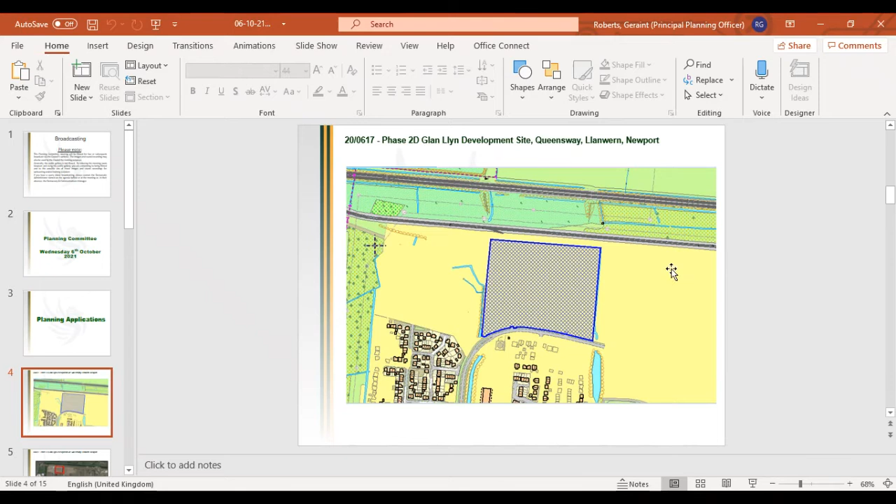Okay, so in effect, then back to the presentation, what we have here is the blue hatched area shows you the phase. Effectively, the land to the west is currently being developed by Bellway, and we've granted approval for houses to the east for Lovells. Okay, so this is, if you like, a fill-in plot, and you'll obviously notice from the number it's been with us for some time.

Okay, so just to confirm that location and where it is, this is the Glan Llyn site, the former heavy end of the steelworks, Spytty here, the Eastern Distributor Road here at the bottom of the picture, and you can see the already developed areas of the site, and this is here, and the mainline railway running across the top, and the Tata service lines running in by there.

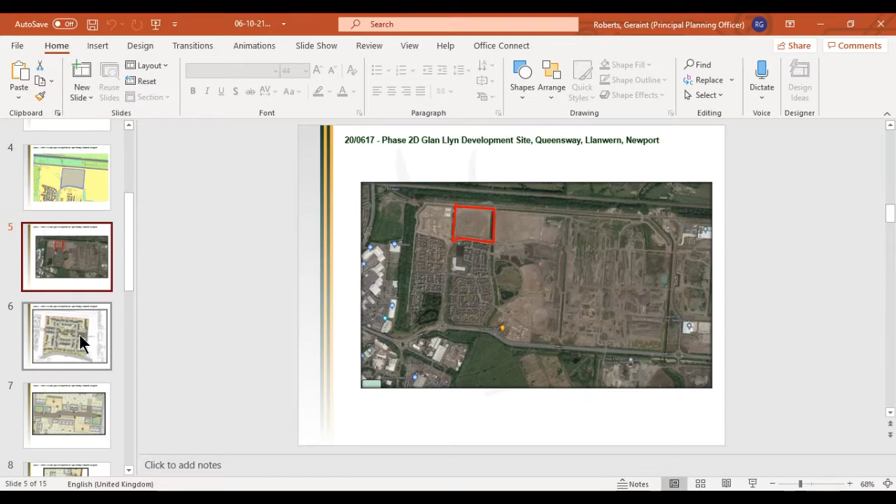So that's the location of our site, and this is the proposed layout. Now, the Avenue Loop Road we talked about is this main road here, so this road is the main road into the site. It will loop round eventually and join up with EDR at both ends, but currently it doesn't. We do have an application in for those final stages of this road, which we're currently looking at. So you can see there is effectively a road in, loops round, comes out the other end.

So these spurs effectively control the layout, and there are connecting roads. One here is a formal standard road, and this is a shared surface which will be permeable to pedestrians and cyclists but won't be to vehicles.

So effectively then we've got these perimeter blocks which face out onto the highways. What we managed to achieve is a good level of frontage, and you can see effectively the houses face out either onto the highways or onto the drainage system which are running either side of the phase. So these blank corridors will contain reens and they will receive the surface water drainage from the site.

Okay, so that is the broad layout, and we're satisfied with that in highway terms, in terms of tracking and also in terms of how it will function.

We were very keen to get connectivity through this phase, and we think we've achieved it. So there are bridges here, you can walk through the shared surface, across onto this main avenue, over the bridge and into the Bellway phases. So we think this links efficiently into the areas around it.

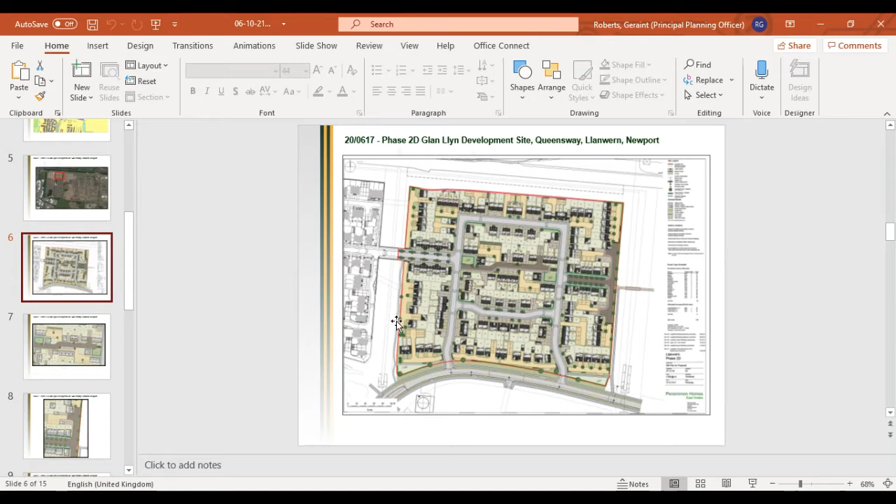Okay, so they've reached the normal parking requirement that we have for them at Glan Llyn, and they've tracked the roads and showed that they will work in terms of the service vehicles which will have to go there, primarily the bin wagon and a fire engine. So all of that is shown to work and we're satisfied with it.

Okay, in terms of the detail of the layout, then the shared surface caused a little bit of toing and froing, but we've got this arrangement, and now obviously you can see it larger, you'll see how it works. So it'll be a non-standard surface, it will be at level, it won't be curbed, there won't be a designated footway, although there is likely to be an area which is, if you like, indicated for the use of pedestrians.

But it will be a genuine shared surface. We're satisfied that it's quite short length, it has limited vehicle movement through it, and everyone who is using it will be people who live on it, so it's a cul-de-sac arrangement.

Okay, in terms of the way the houses will work then, there are some parking courts which you can see here, but they're very limited in scale on this development, and we think that they're appropriate because what that allows us to have is more frontage. And just to explain that, I'll go on to the next slide.

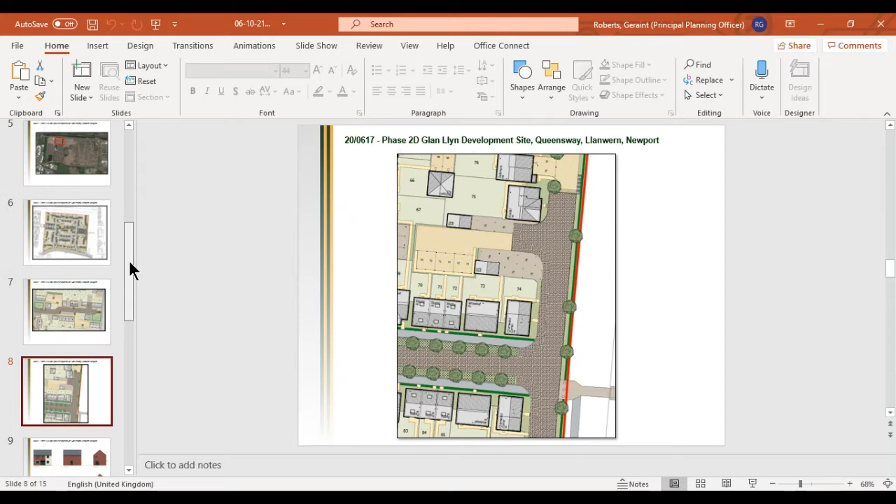Because we have these parking courts, we can have frontage onto the roads instead of basically having a lot of dead curb line and a lot of parking. Okay, so we think this has given us better street scene, and it's given us opportunities for public realm planting like this avenue effect here. So we're satisfied that good planting can be provided across the site and good public realm achieved.

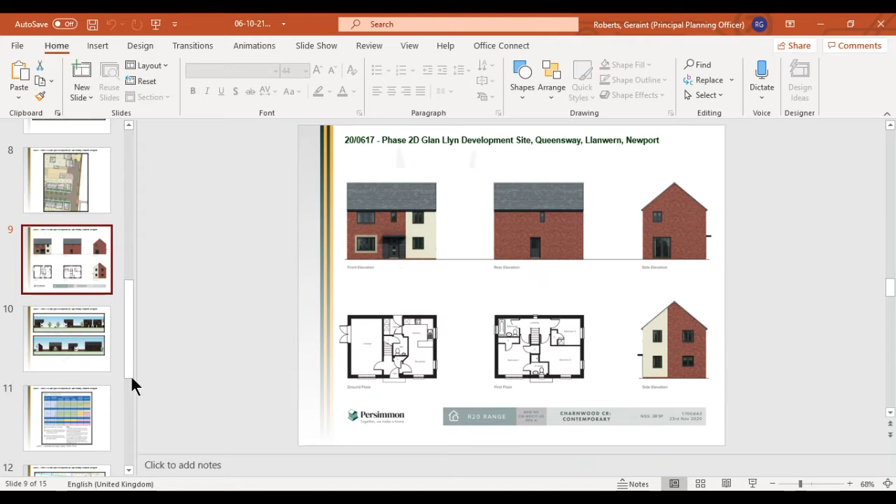Right, in terms of the scale of the building, they're basically 2-storey or 2.5-storey, and there's a limited range of materials, so brick, render, slate effect tiles, and there are small but architectural detailing which we're happy with in terms of detailing around the windows, for example here, the overdoor canopies and some cladding. So we're satisfied that the appearance of the buildings is adequate and will be attractive and lead to acceptable street scenes.

So these are a little crop from the street scene drawings that were given, and I'll give you an indication of spacing and the opportunities for structural planting along this avenue, which we've already mentioned. So we're satisfied with scale and appearance.

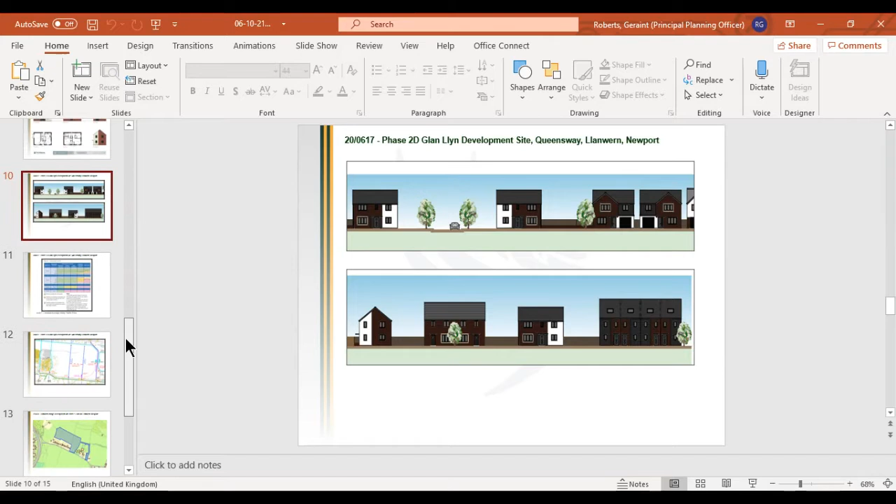In terms of active travel, this little table has come from the 2021 active travel guidance, which is quite recent from Welsh Government. It shows cycling and road speeds which are acceptable. We're satisfied that within the phase, the road...

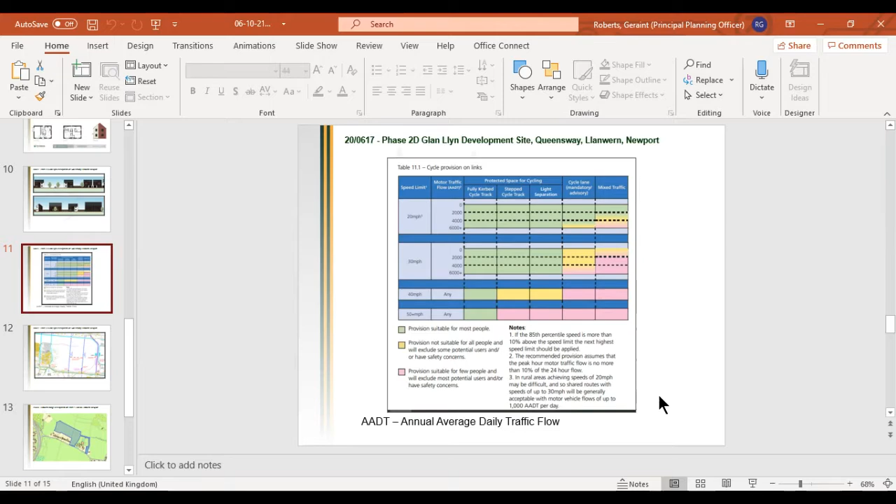Excuse me, Chair, sorry, can you just enlarge that a little bit more please? Because I've got a job to see it. Yeah, no worries, thank you, I'll make it a bit bigger if I can. There we are, is that better? It's a bit bigger now, yeah. Too big now. Yeah, okay.

Thank you for enlarging it. This little table is quite interesting because it shows us what design speeds we ought to be working to for active travel routes. Basically, anything which is going to have mixed traffic, i.e. the bikes and the traffic are in together, needs effectively very low traffic volumes and very low speeds. So that's just an interesting guidance that's recently come out from Welsh Government in terms of what we should be working to.

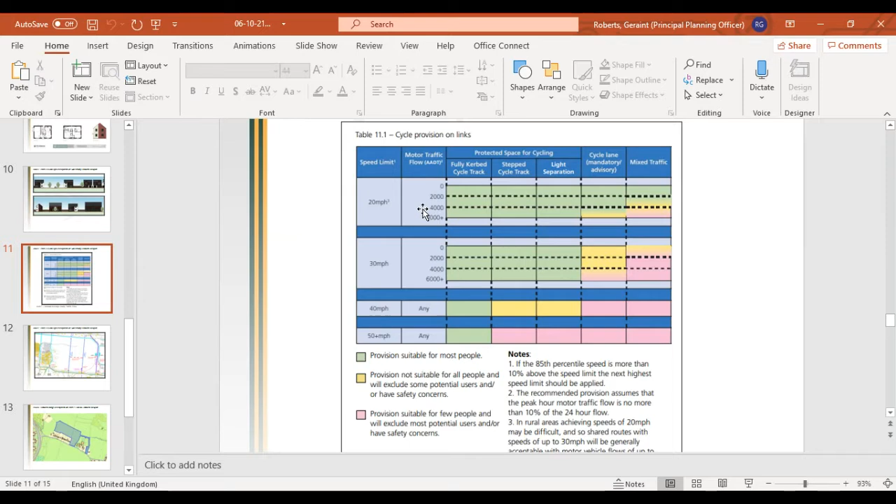But overall, we are satisfied that the road system within this phase will give sufficient low speed and an appropriate environment for people to cycle through, i.e. low traffic volume, low speed, which is what we're looking for. Effectively anything green is good for cyclists and anything orange or red is less good. So as soon as you get into high speed roads and high traffic volumes, most cyclists are discouraged. But overall, we're satisfied that active travel can be achieved within this phase.

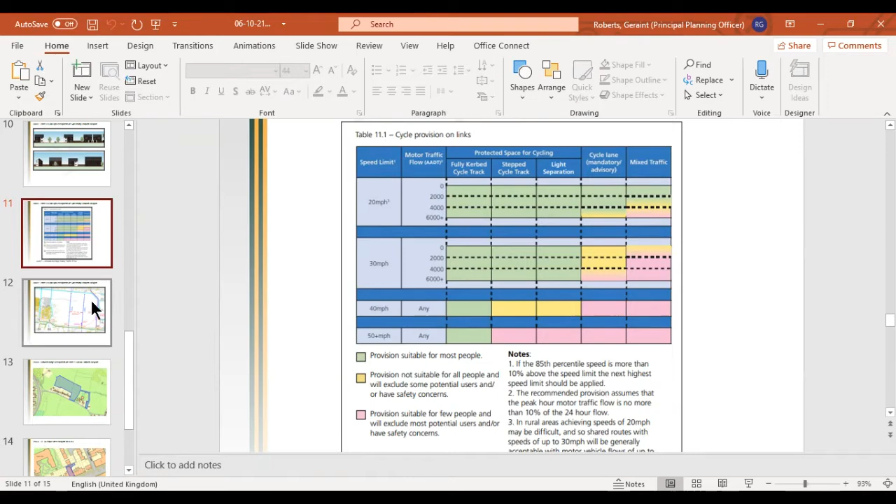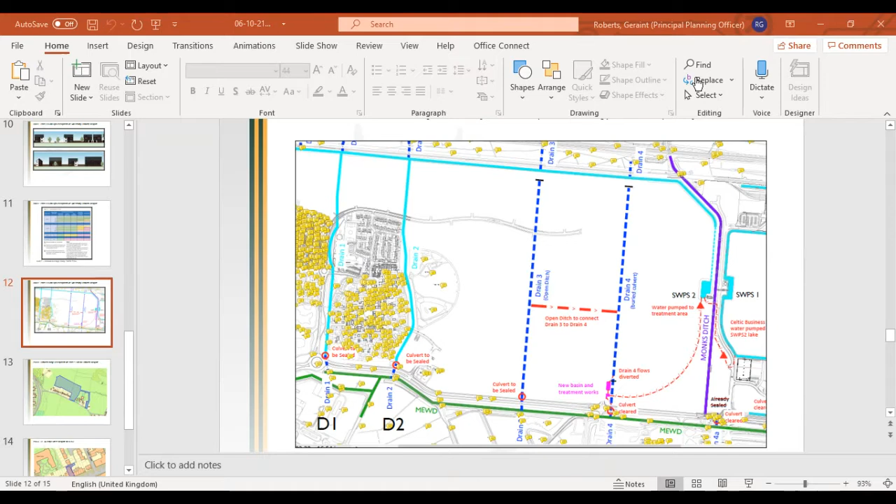Sorry Chair, I forgot to put my hand up. I've got a couple of questions though please. How many houses are actually going on the site, on that site there?

Sorry Councillor, the whole site or the phase? Just that phase one there. The introduction said 180, but let me just double check. On the proposal it's got 178. Is it a typo error? Yeah, it's 178. What happened is there were some slight changes in the layout, so the application description is correct - it's 178. So for clarity, it's 178.

Right, because on section 1.3 it's got 180 dwellings. Yeah, no, that's wrong in the officer report. Let me find it now - there is a table because I normally put one in which gives the breakdown. Just bear with me a moment, get there in a minute. Paragraph 7.2 gives you the breakdown between bedrooms, market housing and affordable. It's definitely 178.

Okay. Also, on slide 8 you've got the waste vehicle access - be able to get down that road, that footpath into empty bins around that area.

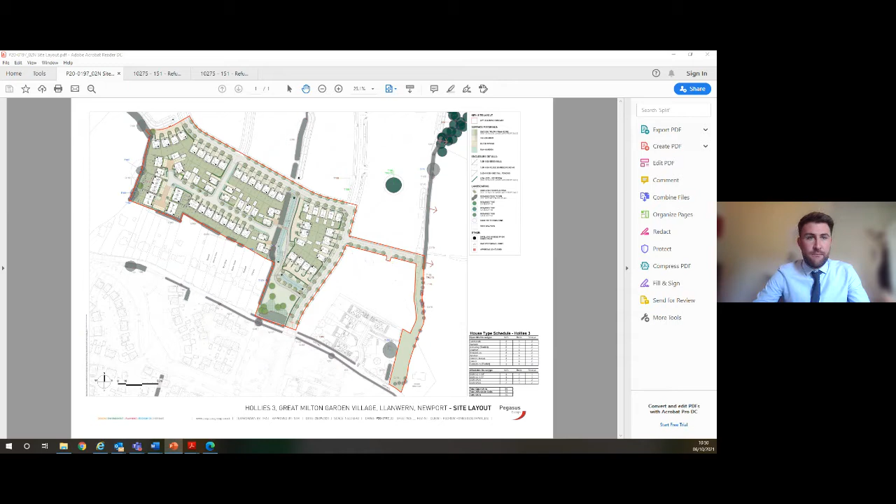So this application, 210293, is a reserved matters application at the Llanwern development site on Cot Hill. The application is reserved matters for 75 houses, associated infrastructure and landscaping, pursuant to outline permission 160864, which is a residential development for up to 1100 dwellings and provision of other infrastructure, listed as: primary school, village centre, public open space, landscaping and associated infrastructure works. The application is also applying to partially discharge a number of conditions as listed within the description.

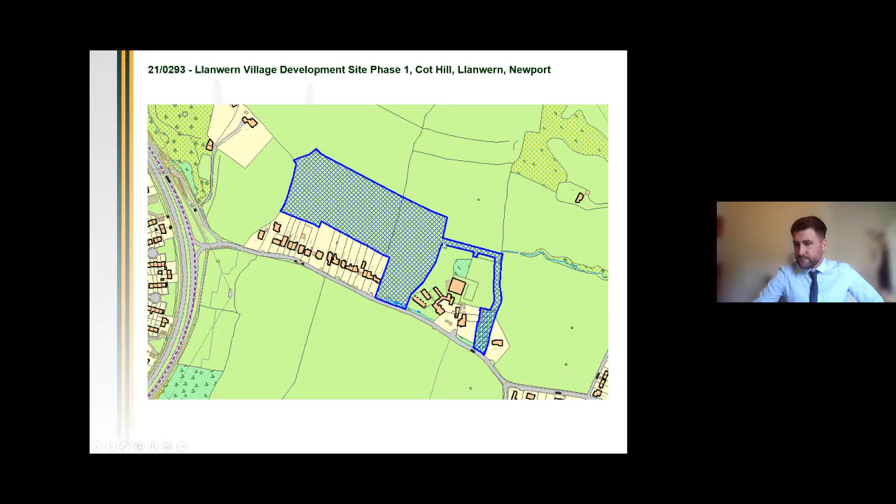So now the application is proposing to break through into the northern part of the site. This is the first residential application we've had, the first reserved matters application for houses to the north of the site, and it includes the access into the north.

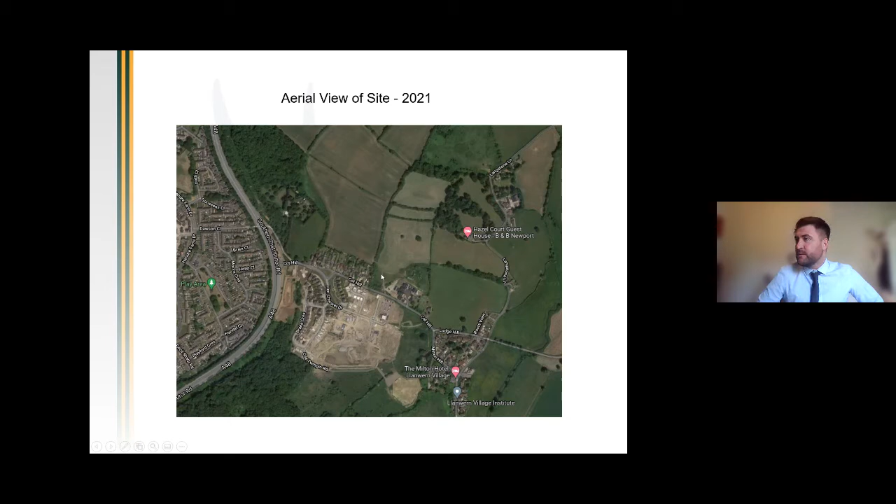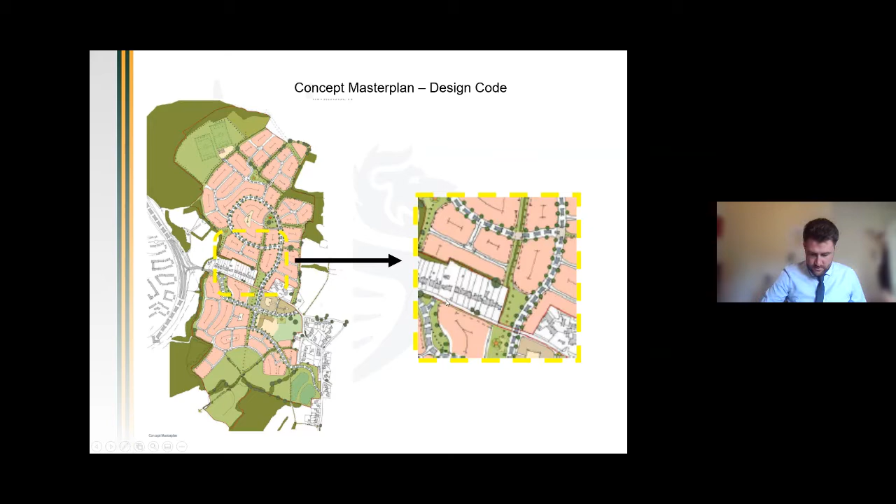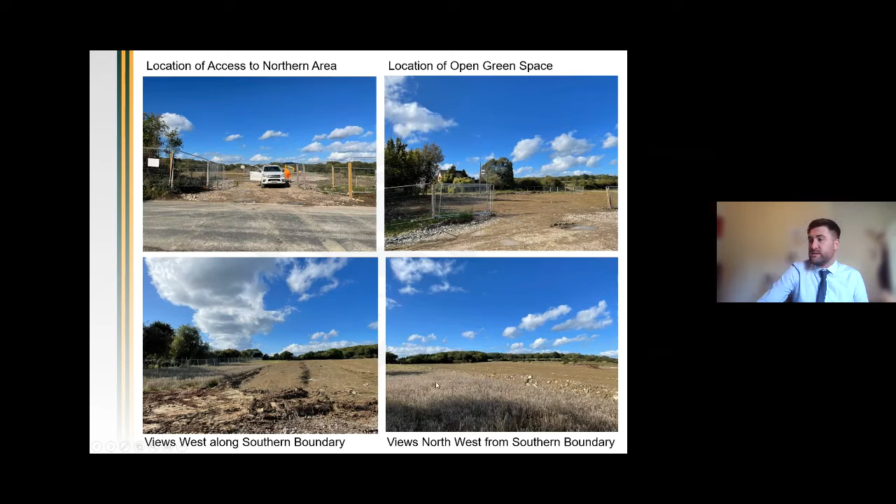As you go left through the gap in the hedgerow here, we come over to the west of the site, and standing on the southern boundary, we're looking northwest and north. The site is approximately 3.49 hectares in size - existing agricultural land, agricultural fields.

So the key considerations of the application will be compliance with the approved indicative master plan and design code documents, the assessment of design, appearance and placemaking considerations, the amenity of future residents of the scheme, as well as the amenity of existing neighbouring residents, matters of parking and highway safety, drainage, landscaping, trees and ecology, and noise.

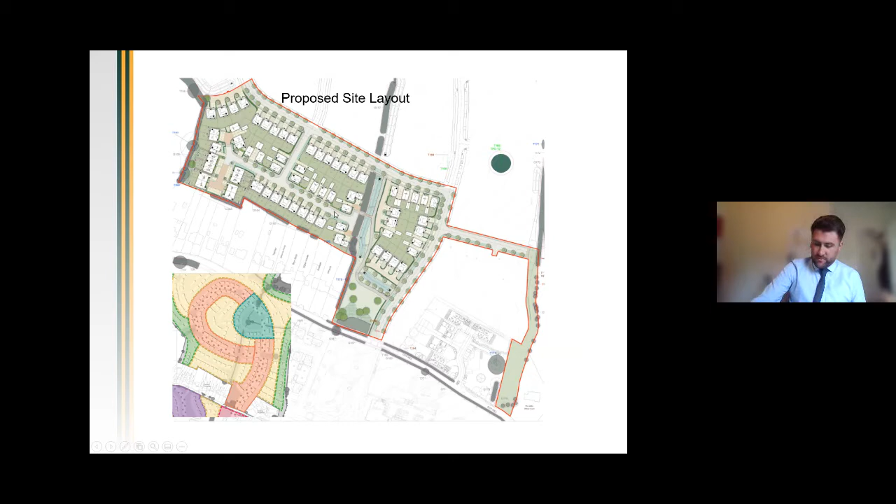That covers that, so that covers the general layout. We'll go through some of the more specific points in due course.

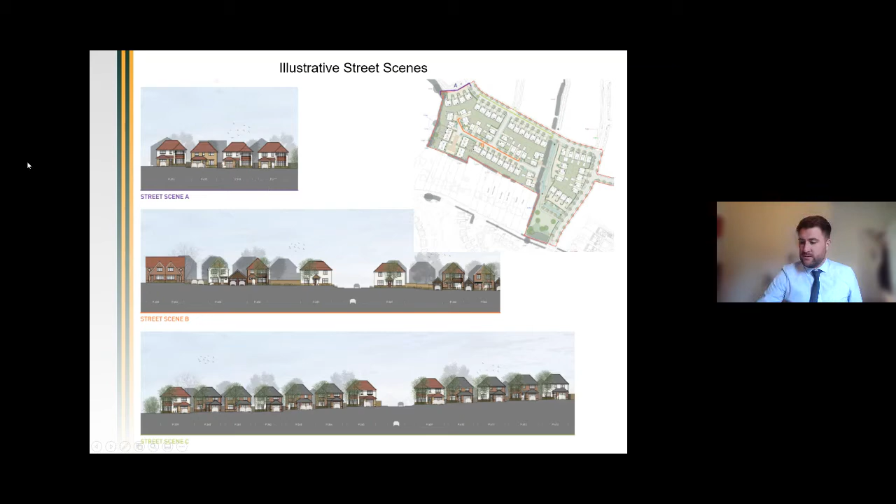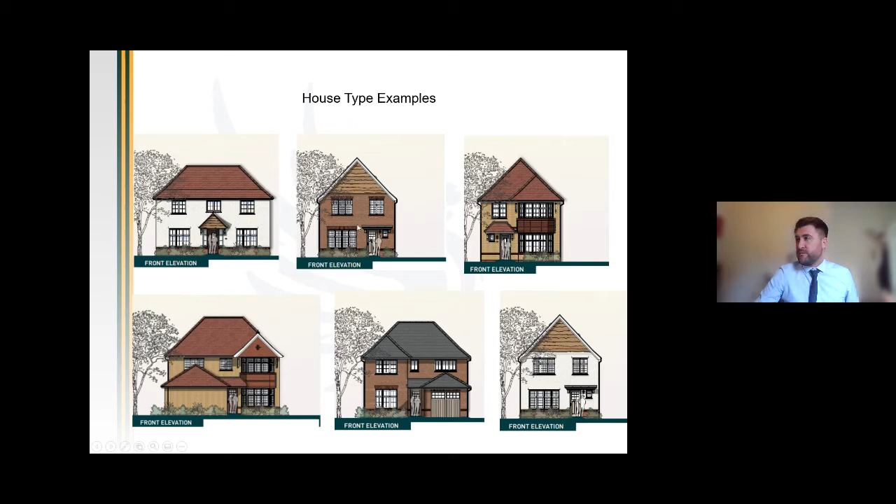So hopefully that just gives you a bit of an indication as to what we're looking at with those.

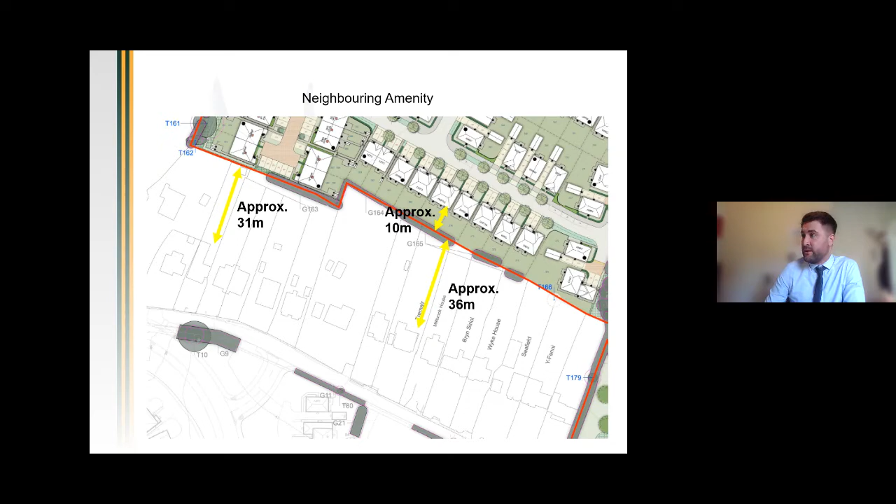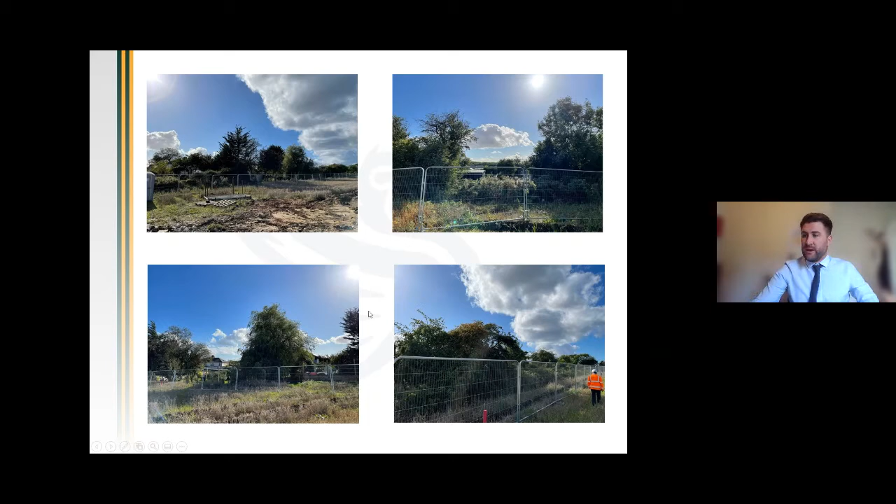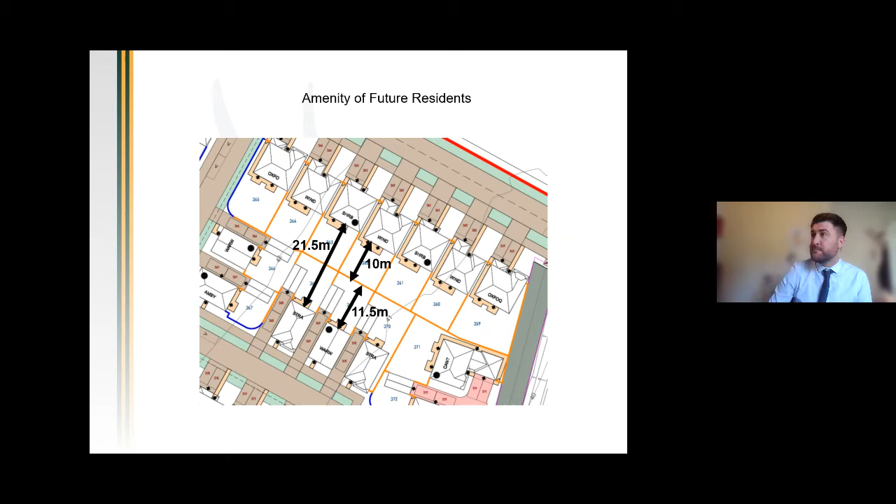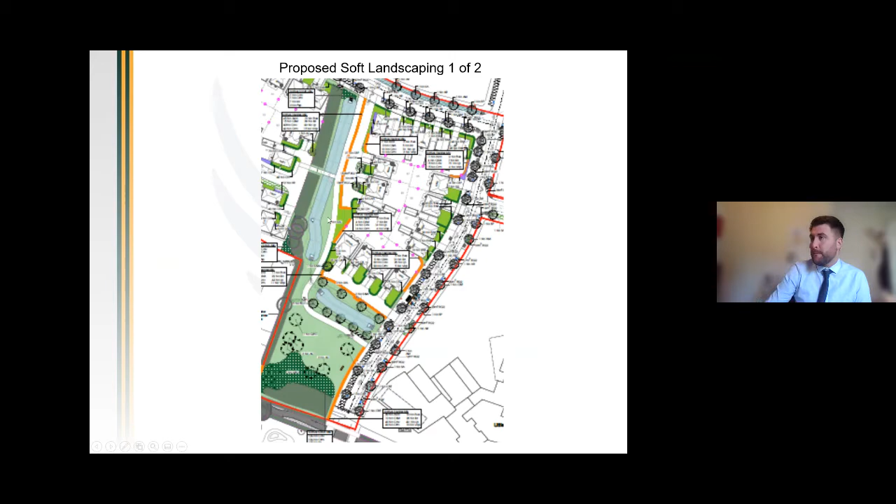Over to the western side, this is more the residential street. You can see there's green frontage and planting along the highway, with hedgerows proposed on corner locations, and then the general garden spaces.

What we've got over the west here, we've negotiated the change of this boundary with the tree officer. Originally the fence was going right up to the boundary underneath these trees. The purple or pink lines are the protection areas for these trees, so we've agreed that these are set in from the site to create more of a breathing space for the landscaped edge, the woodland edge. There's also proposed scrub mix planting along these boundaries, which will be secured via condition.

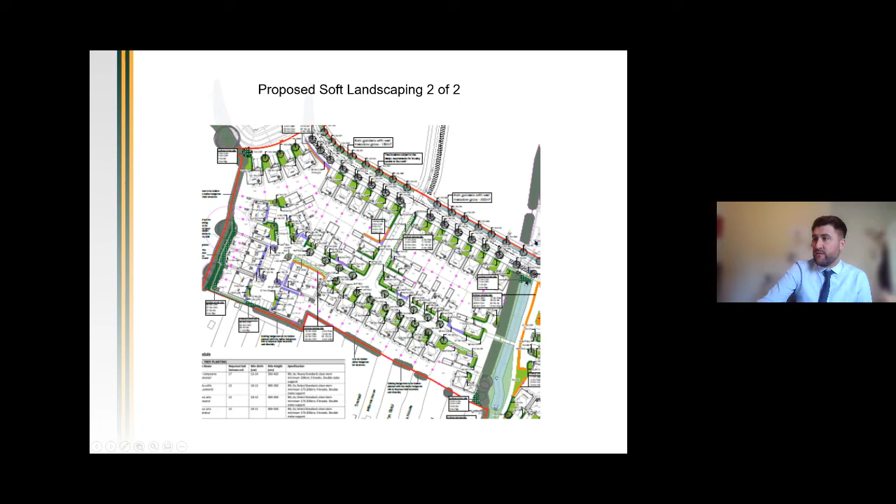In terms of ecology, the site itself, because it's got a lot of existing hedgerows and similar features, has been considered suitable for dormice, which are a protected species. There have been existing surveys at the site over the years which haven't brought any records of dormice, and more recently a further survey has been undertaken. Natural Resources Wales have requested a dormice conservation strategy to be submitted, which the applicant has done. This includes the survey showing no records of dormice, as well as mitigation and enhancement measures, because whilst none were found, the habitats are suitable for dormice.

We are awaiting a final response from Natural Resources Wales. We were hoping it might have come in just before planning committee, but we're still waiting, and it should arrive within the next few days.

So what I'll get to at the end is that what we're recommending is that delegated authority is given to the head of regeneration, investment and housing to approve the application, if that's the way the committee chooses to go, provided we get a no objection from Natural Resources Wales in the next few days.

Similarly, there were 2 trees being removed within the site which have been identified as having potential for bat roosts. More recent surveys submitted have shown there are no bats present on those trees. An ecological assessment of those trees has been submitted, identifying measures such as soft felling of these trees as a precaution. They're also proposing bat roosting bricks incorporated into the houses on the scheme, and we've recommended a condition in relation to bat roosting bricks to make sure we're happy with how many there will be, where they'll be located, and that they're retained moving forward.

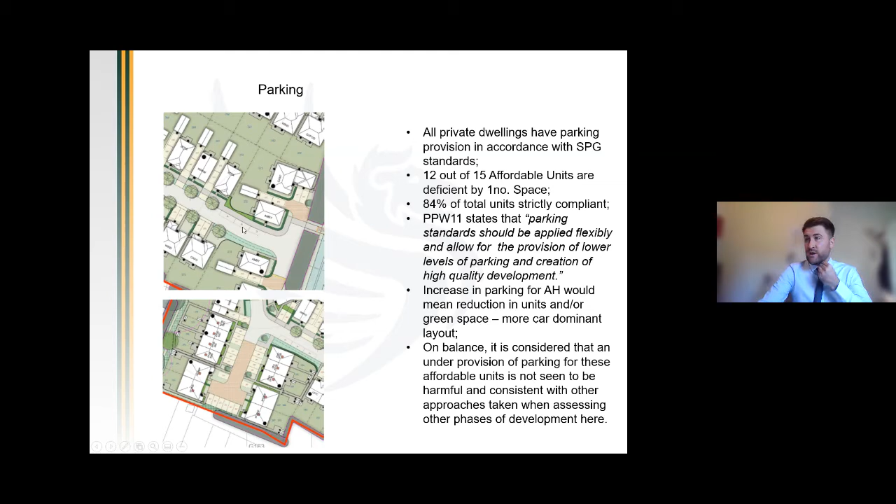We find that on these residential streets, if we start putting in formal visitor spaces, they'll often get privatised by dwellings, and then they're not available for visitors. So we're comfortable with the approach to visitor parking on street, that will be acceptable.

I touched upon the affordable housing provision in relation to parking, but there's 15 out of 75 units that will be affordable housing, so that equates to 20%. The Section 106 agreement for the overall site, for up to 1100 houses, will require 20% to be affordable. So if you take that in isolation as part of this phase, it is compliant with that Section 106 agreement.

As I touched upon earlier, there'll be 8 2-bedroom affordable flats, 5 2-bedroom affordable terraces, and 2 3-bedroom affordable terraces. So we're happy with the mix, and we're happy with the provision that will be provided on site.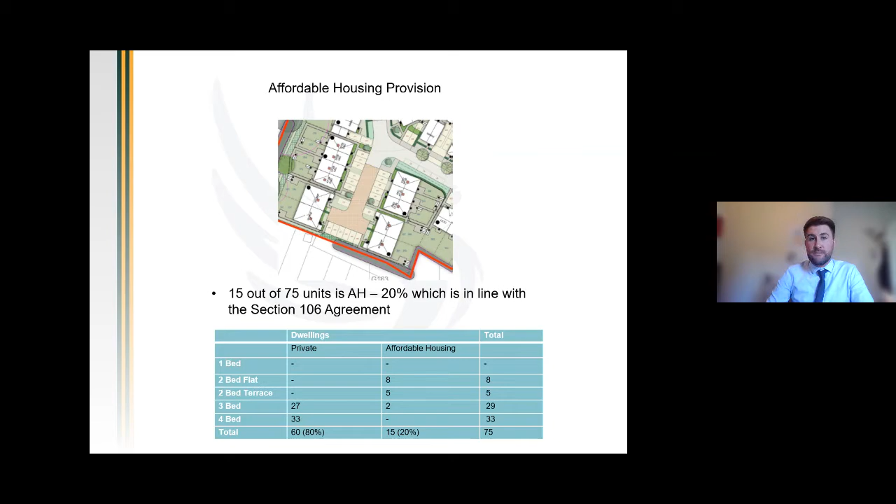So this takes us on to the next 2 conditions which are being sought for approval. The first one is condition 19, which is noise. So the outline planning permission for the overall site identified that a noise survey needs to be submitted for this area.

In terms of ventilation, it would be to a building regulation standard, and that would be fine. However, we've got concerns that during periods of warm weather, for example in the summer predominantly, residents would really want to open their windows to allow sufficient cooling of these rooms. That would then expose them to road noise.

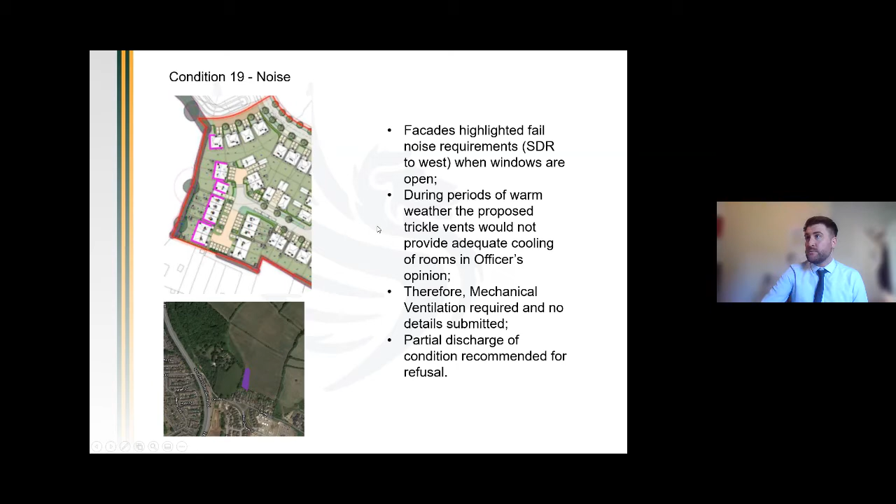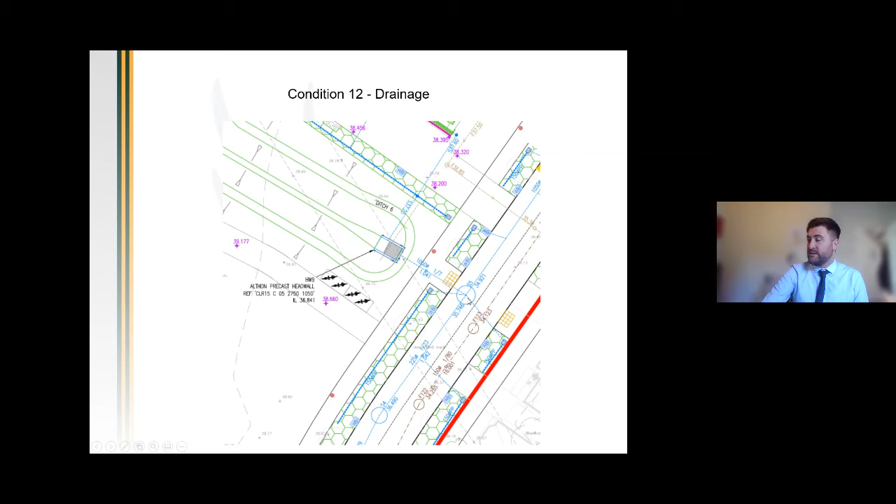This moves me on to condition 12, which is for drainage. This is a very small snapshot of the layout for drainage. For example, we've got the main highway that runs through here, and basically what we've got is a surface water drain which runs underneath the highway. There's a swale here, for example. If this collects water, that'll be linked into the surface water drain underneath the road, as will the rain gardens, as will any highway drains. So they will link into the main surface water drain for the site, and then that will continue south. We are here with this phase, so it will link into this main road, continue south, and then it'll go beyond through the main infrastructure network for the road layout.

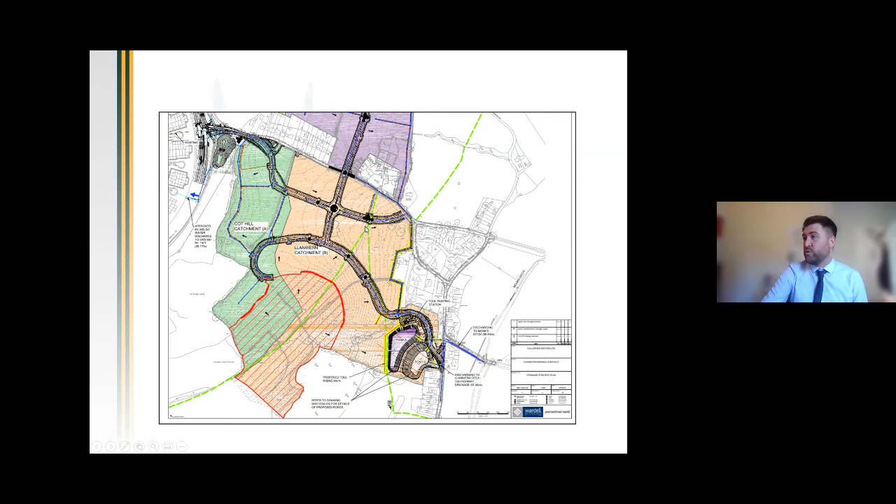So what we are proposing is what we proposed previously for applications at this site, that the surface water for construction drainage is approved by a conditional discharge with officers before any work starts on site. So basically, how is that surface water during the construction phase going to be managed? We'd expect to see a scheme of that.

And then in relation to the development, we're saying that no hard surfaces shall be provided until such a time that a contract to construct the attenuation ponds that the phase relies upon has been awarded to the contractor. Well, clearly a contract has been awarded to the contractor because they're developing on site, they're developing the ponds right now. So what we would like is confirmation of that contract and the timescales for completion. That will give us the confidence of who's doing it and when it's going to be completed by. Once we've agreed that that is a satisfactory timescale for implementation of these ponds, we will then allow hard surfaces to be carried out on site, because we know they will be linking into the attenuation ponds within an agreed timescale.

So those are the two additional drainage conditions that we are requesting, but we are not recommending discharge of condition 12 for the drainage of the site.

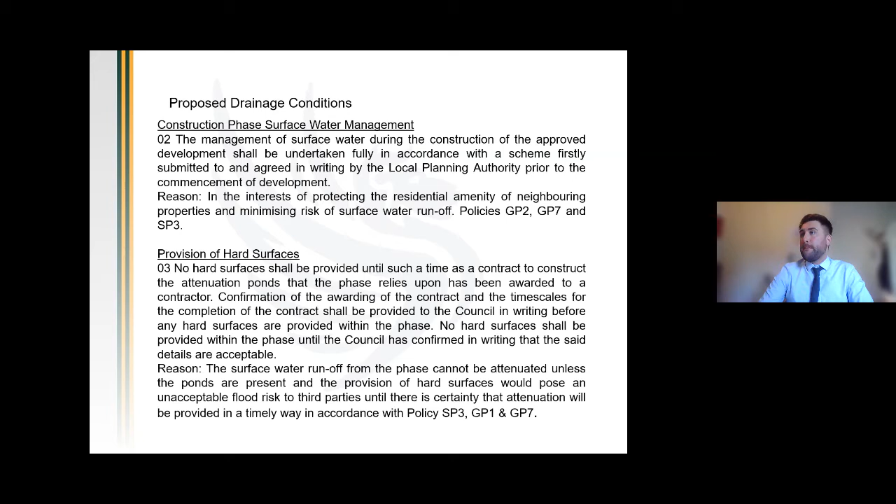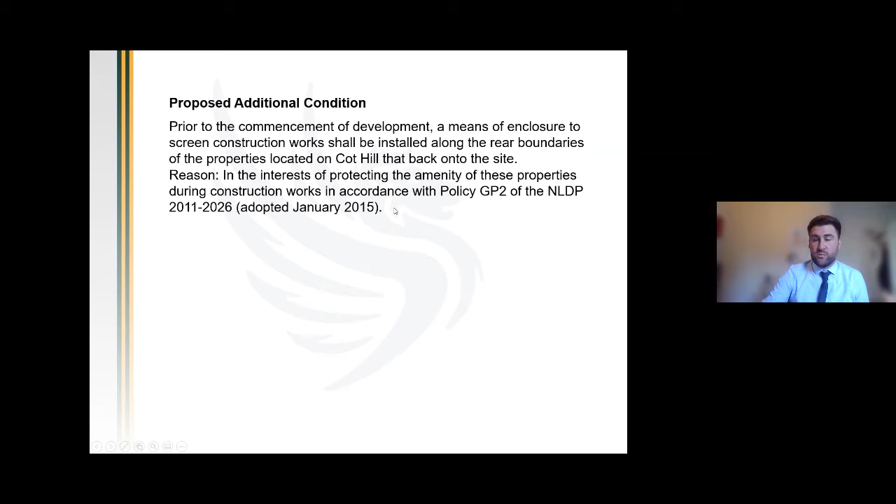So the overall summary is that the scheme provides affordable housing in line with the Section 106 agreement. There's good pedestrian links and movement through the site to encourage active travel between phases and into the wider area. There's good informal recreational opportunity within the proposed green spaces, and good links to the future village centre, school and other green areas. I won't go through everything I've covered within the course of this application, but we are satisfied with the overall layout and with the overall proposal.

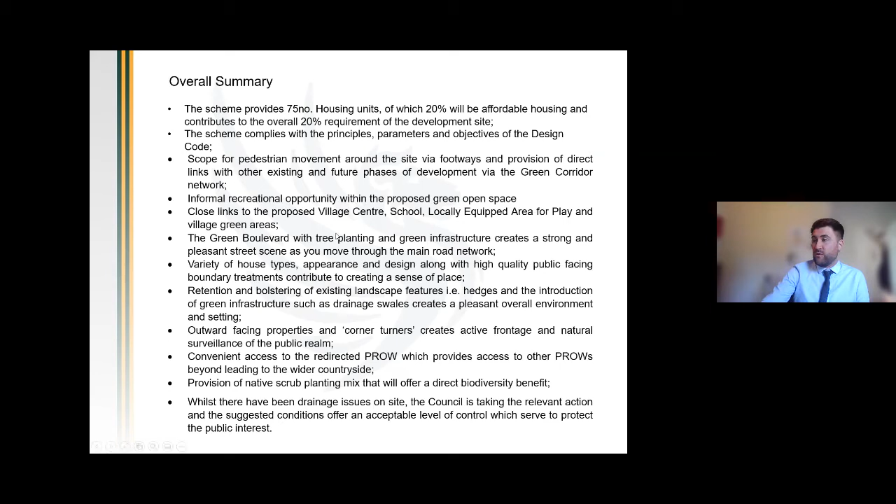As I mentioned earlier on, there's two outstanding issues that we are expecting Natural Resources Wales to get back to us on in due course. Hopefully it'll be this week, we've been advised, but it may be next week.

So what we recommended is delegated authority is given to the Head of Regeneration, Investment and Housing to issue a decision to part approve with conditions and part refuse the application on receipt of a no objection from Natural Resources Wales. So if Natural Resources Wales come back and they just need some minor tweaks to one of the submitted reports, for example, then we could agree that with the applicant and approve the application.

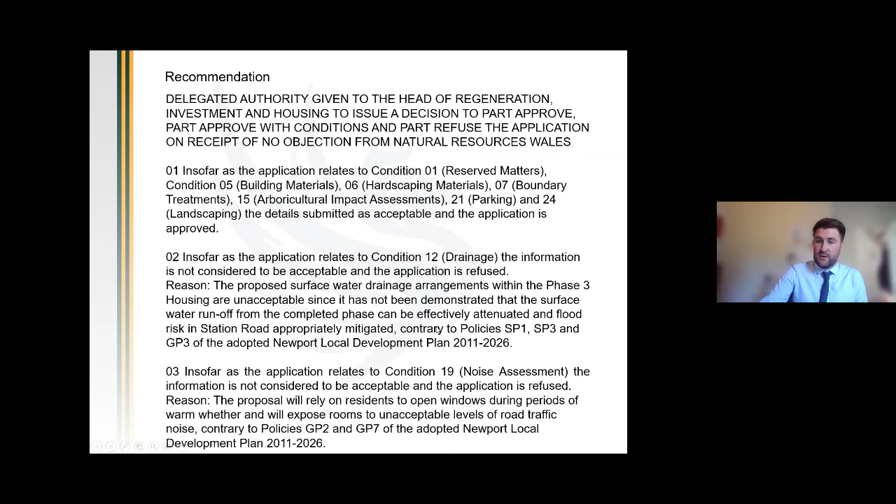If they come back saying no objection, that's absolutely fine, then we can use our delegated powers to approve the application. Whereas if they come back with an objection and there's an issue, then we will have to resolve that with the applicant, and then bring the application back to the planning committee for consideration. So overall, we're recommending the reserved matters and these conditions are approved, and we're recommending refusal of the drainage condition and the noise assessment condition as mentioned previously. That's everything, thank you, Chair.

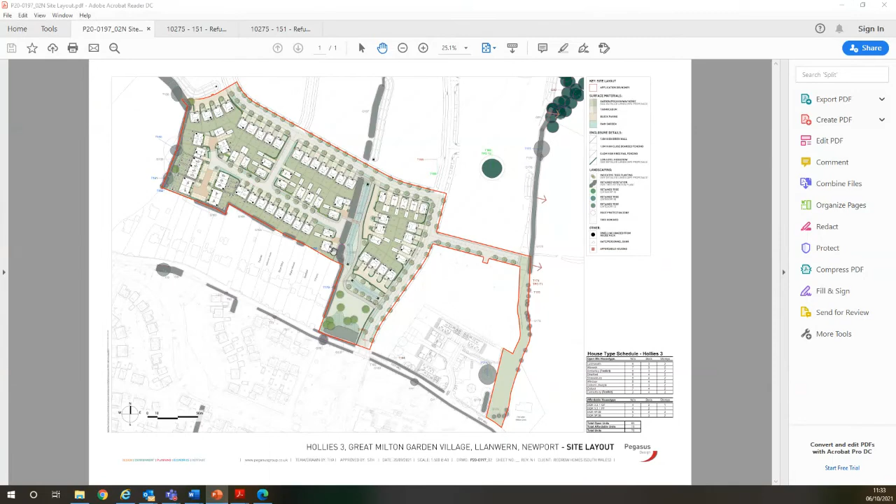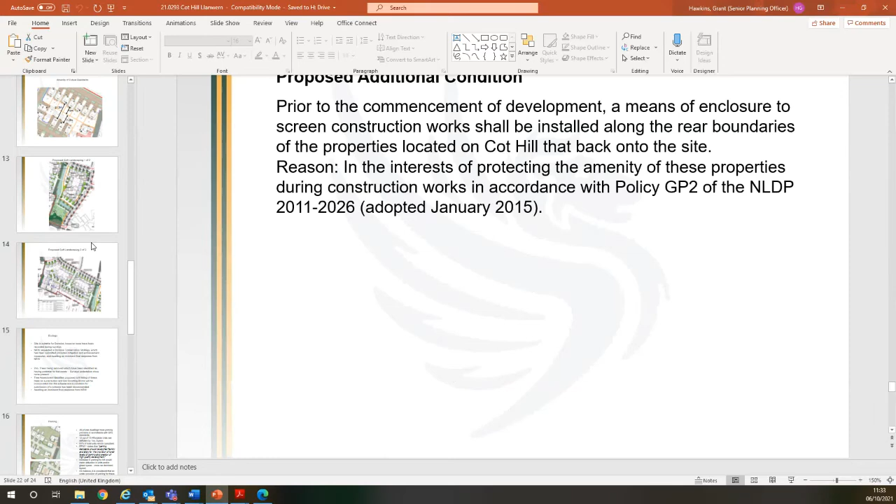Okay, I have concerns about this, Chair, in regards to this 21 metres. Is that the minimum that we're allowed between the two? That's the one. So the 21 metres.

So 21 metres is generally accepted, but also within our new dwellings SPG, if there is 21 metres between two windows that directly face each other and they are both habitable rooms - for example, a bedroom facing a bedroom or a living room facing a living room - that is sufficient space to protect the privacy of the occupiers of both dwellings.

The 10 metres for the garden space is generally because if you put a 10-metre garden here and a 10-metre garden here, that would only be 20 metres, but you're broadly meeting that separation distance. These properties won't really have severe views into the rear of these gardens, considering there is a 1.82 metre high close board fence in between. So 21 metres is the accepted standard for separation distances.

Okay, understand that, Grant, but what if those residents in the 10-metre one and 11.5-metre one put in a further planning application to extend their properties to the rear? That is going to make it less than the 21 metres, isn't it?

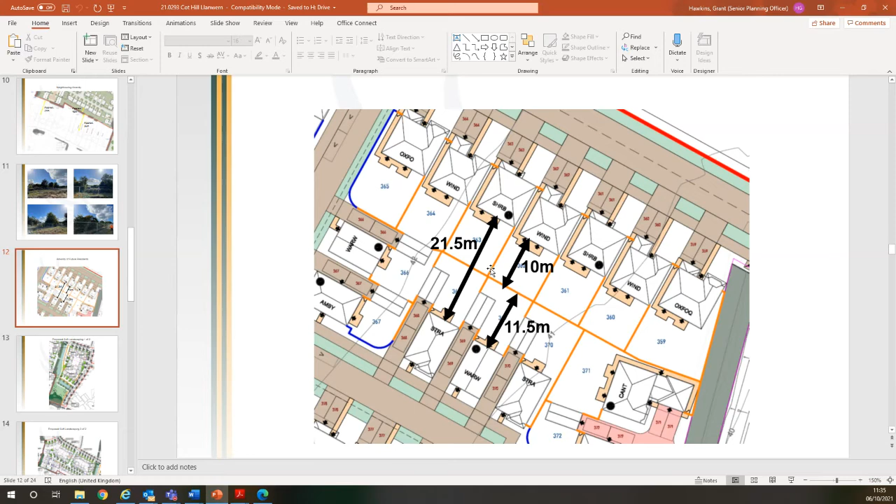What is key here is the 21-metre distance is between habitable rooms. You would like to think that whoever designed that extension would take the amenity of neighbours into consideration. If we weren't happy, if we thought there was a bedroom window facing another bedroom window at, say, 14 or 15 metres, that could be a reason for refusal if we thought there'd be harm to the neighbouring property.

What you'll often find is anyone competent in designing an extension would perhaps put a bathroom there, which would be obscure glazed, and we could control that as non-opening, for example, the window. So ultimately it would be subject to a future application, but there are measures in place that we would have to take into consideration when assessing that application.

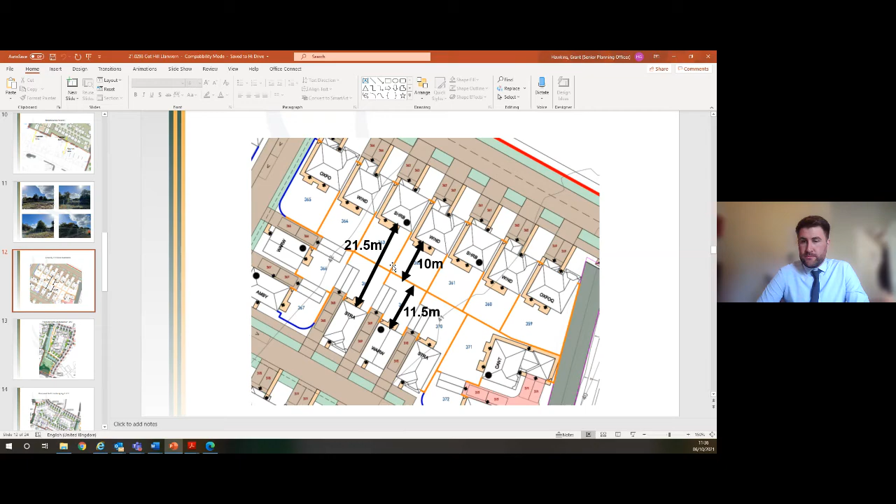Okay, the other thing is, Chair, I've brought up on a number of occasions the affordable homes. Some developers will tell Newport City Council Planning Department how many social housing units are in that affordable homes provision, but some developers don't. Can we insist on that in future? Because you've got 15 affordable homes - there might not be any social housing in that, as far as I'm aware. We don't know.

Sorry, Councillor, it's Geraint Roberts again, just briefly butting in. From memory, the Section 106 agreement that secures the affordable housing provision upon this site basically says they have to meet the Welsh Government's definition of affordable housing as set out.

I think there are various flavours of affordable housing. I take your point on that in terms of staircased ownership or fully social rented and so forth. But broadly speaking, what the Section 106 agreement requires is that the affordable provision is placed under the control of a registered social landlord and meets the definition given in the technical advice notes that Welsh Government have issued. So we're satisfied that the affordable housing is affordable housing in a planning sense, although I agree it may allow a variety of different forms of tenure, but it is all affordable tenure so far as Welsh Government is concerned.

Okay, well, thanks for that. But Councillor Watkins, that was a can of worms question, to be honest. Okay, I understand that. I'll have to take it up with Welsh Government, and I think to make it clear so we can get more social housing within the developments which we have. Thank you.

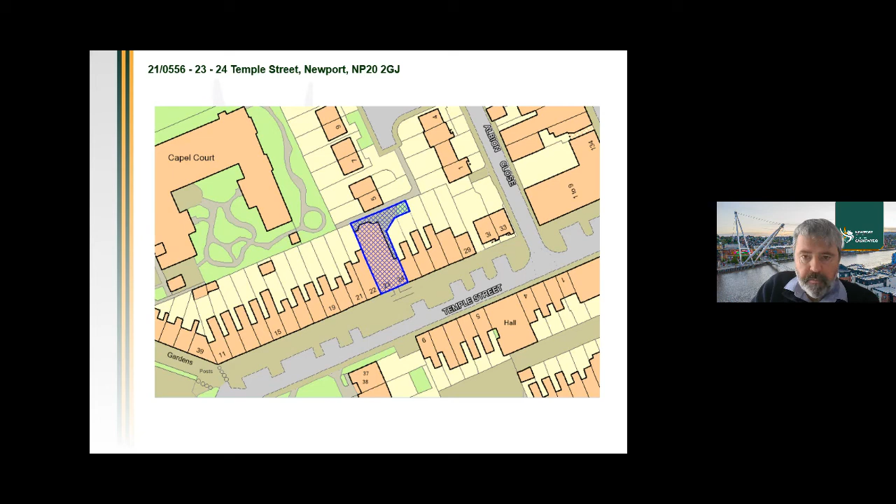This shows the building, the community building we're talking about, and the canopy would be proposed in the rear amenity area, which extends to the rear of these properties here, sort of dog-legs in.

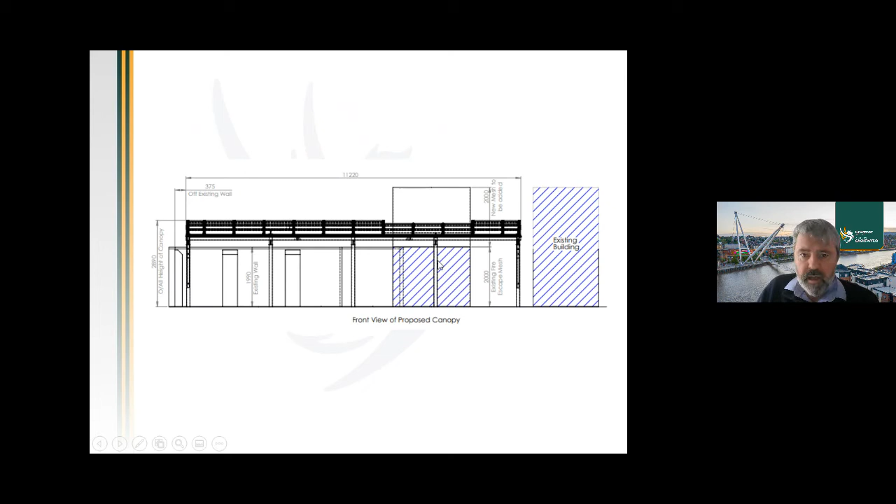Aluminium posts and a polycarbonate roof. Maximum height is 2.9 meters. We don't think that the proposal has an adverse impact on neighbours, and visually it is acceptable. So we're recommending planning permission be granted. Thank you, Chair.

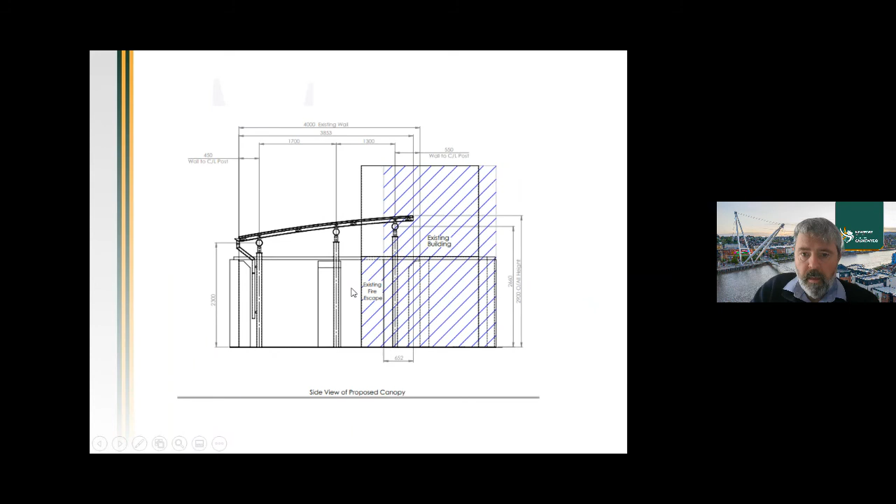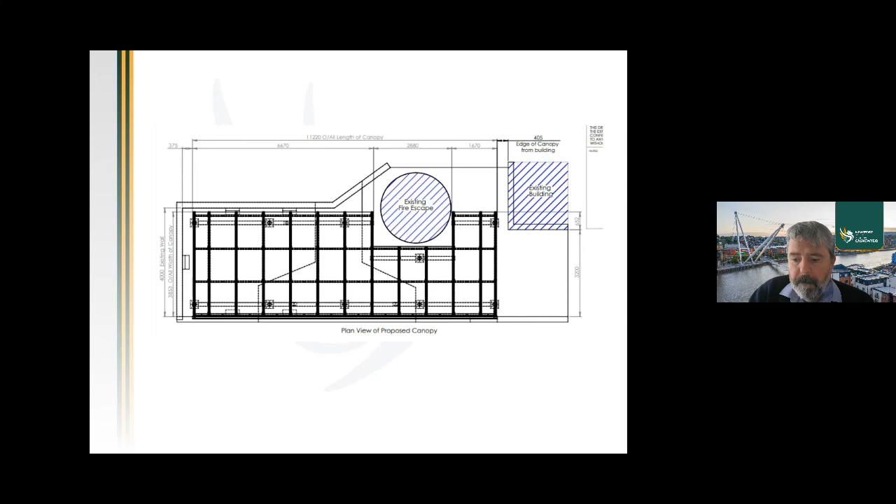Well, you've gone too far. All right, can you see that? No, go back again, a bit far. Yeah, and more, and again, and again. There. Oh, not that one, that one before it.

Councillor Watkins: Right, is there going to be any rear access into that canopy area from the close? Officer: No, there's no proposal to open up any access, it's going to remain enclosed. Watkins: Okay, lovely, thank you, that's all I wanted to know.

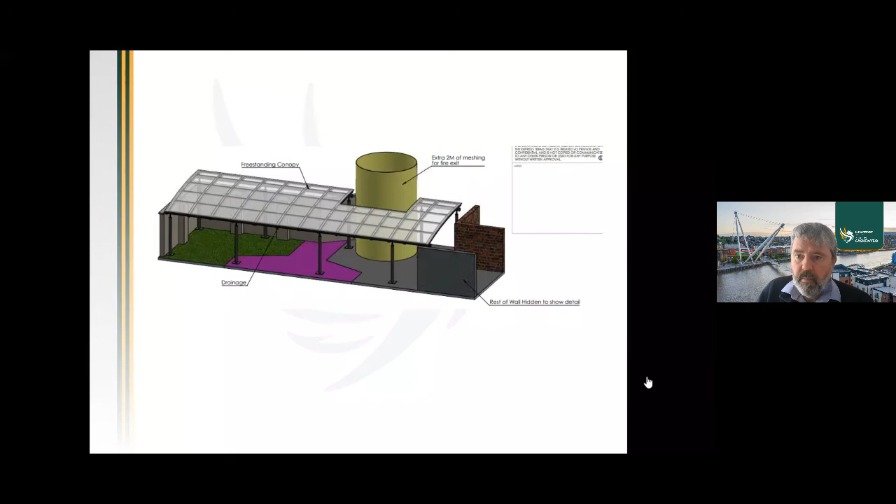Thank you, Councillor Watkins. Thanks, Stephen. Councillor Guy: Yeah, I haven't specifically got a question, but I think it's obviously something worthwhile for that particular provider. I'm prepared to make a proposal, but whether anyone else wants to make any comments. I've got no one listed at the minute, so if you wish to propose something, Councillor Guy, go ahead.

Councillor Guy: Chair, I propose that we accept the officer's recommendation on this planning application. Chair: Is there a second to that, please? Councillor Spencer, second. Thank you very much. Pamela, can we move to the vote, please?

Thank you, Chair. Councillor Guy, please - for. Thank you. Councillor Clark - for. Watkins - for the officer's recommendation. Thank you. Councillor Jordan - yeah, for. Councillor Spencer, please - for. And finally yourself, please, Chair - for the officer's recommendation. Thank you. That's a unanimous vote for the officer's recommendation.